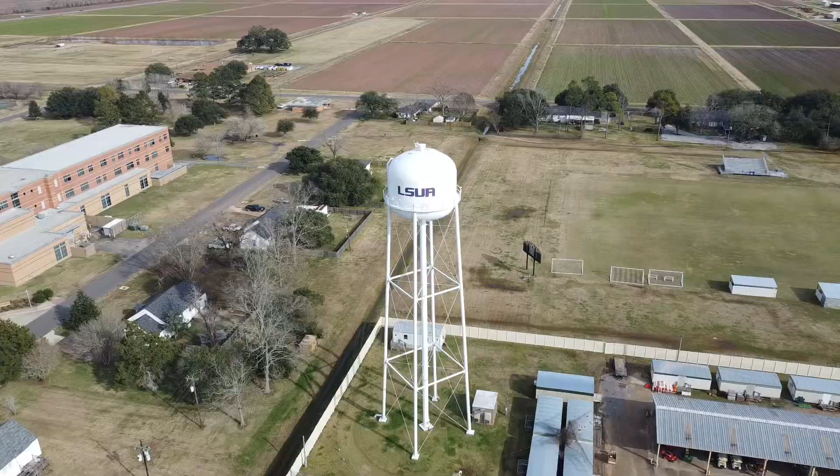Hey guys, today we will be talking about the law of conservation of mass and energy, and continuity, as these things relate to irrigation systems.

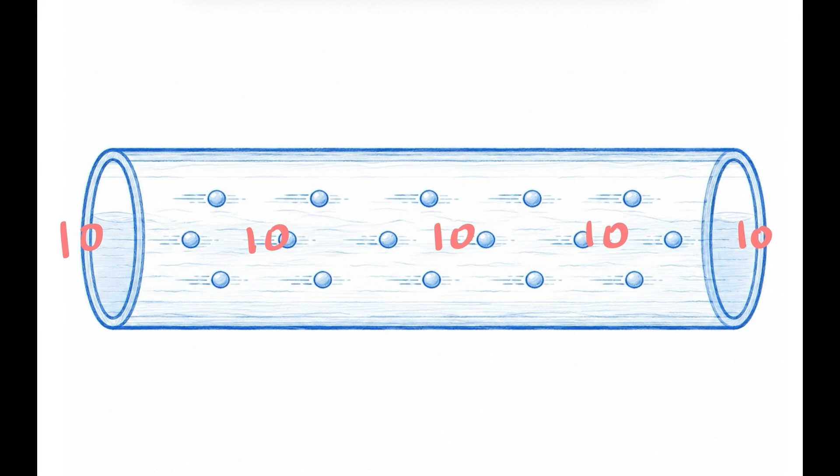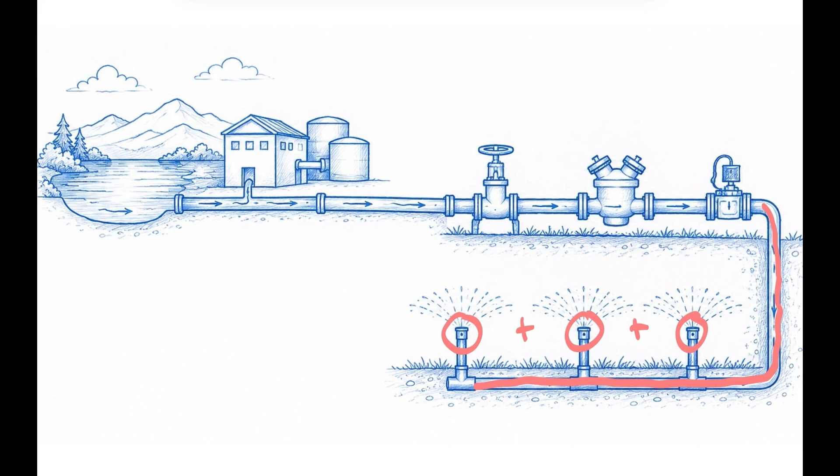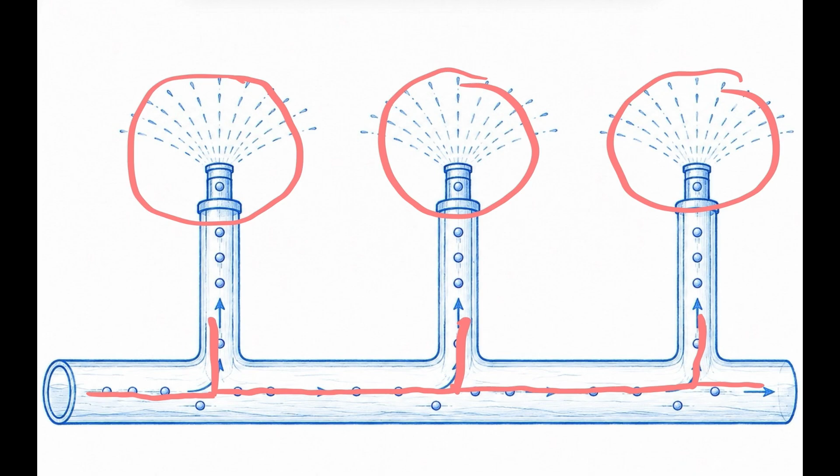The law of conservation of mass is this concept in physics that means that as water moves through a pipe, the amount of water doesn't change. The same amount of water exiting the system through sprinkler heads and faucets first had to move through the pipes, valves, fittings, backflow, even further up to the water main, pump house, treatment plant, whatever. So when the pipe branches, the flow splits between different paths, but if you add all of those up back together, it's going to be the exact same as the total amount of water that entered the branch.

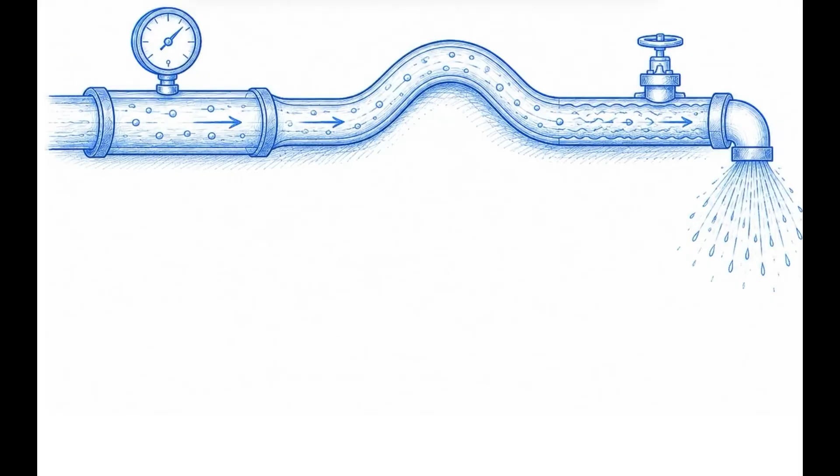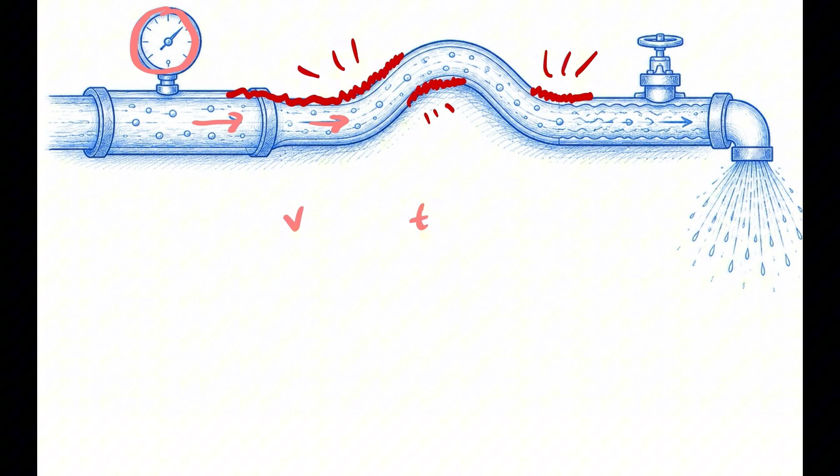The law of conservation of energy now is separate but similar. It's saying the same kind of thing about energy. Energy is not created or destroyed, it only changes forms. So in an irrigation system, pressure is an expression of energy, and that can turn into velocity. Velocity can turn into turbulence, and some of that mechanical energy becomes thermal energy through friction. Pressure can also become elevation.

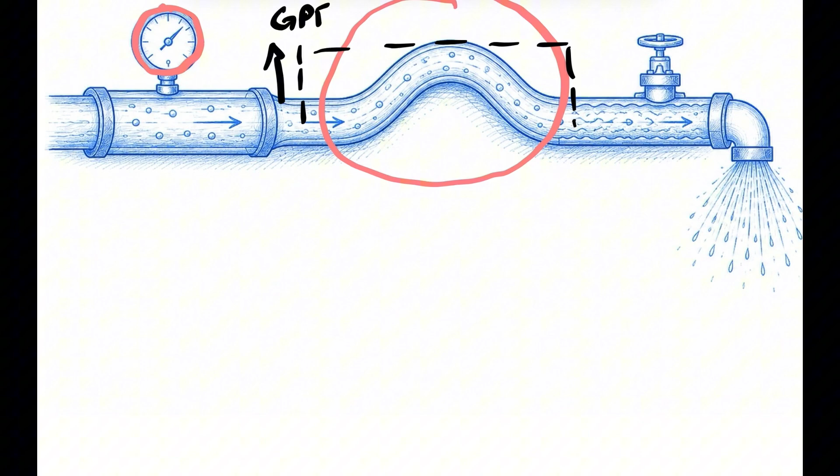It can be used to do work. So for example, as water flows uphill, some of that pressure is converted into gravitational potential energy. Then as the pipe comes back downhill, that energy is converted back into pressure.

Continuity is the final principle, and that just basically says that because water is essentially incompressible, it's not like air, you can't compress it, its density stays constant, and that goes into some equations that output this idea that flow rate is determined by two things.

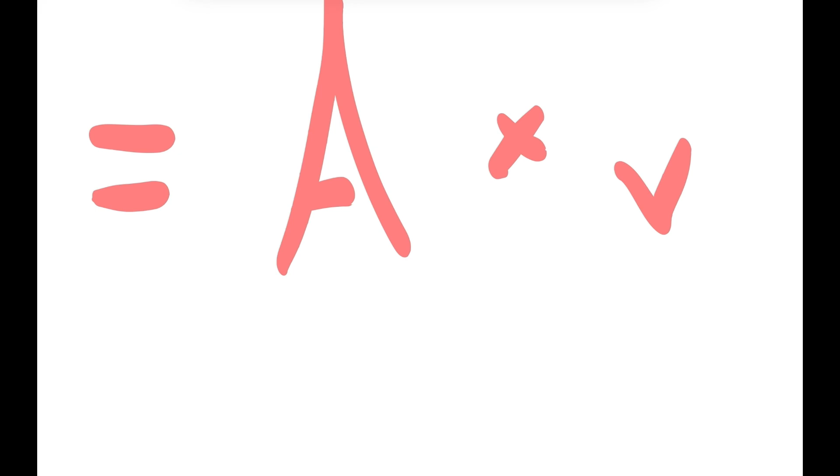So Q equals A times V. A is the cross-sectional area of the pipe, and then we multiply that by the velocity of the water moving through it, which is why we have gallons per minute. We're looking at the cross-sectional area, the amount of water in a certain amount of time traveling through that area.

That's also why sprinkler nozzles take pressure inside the pipe and convert it into a high-speed stream of water that travels across your lawn.

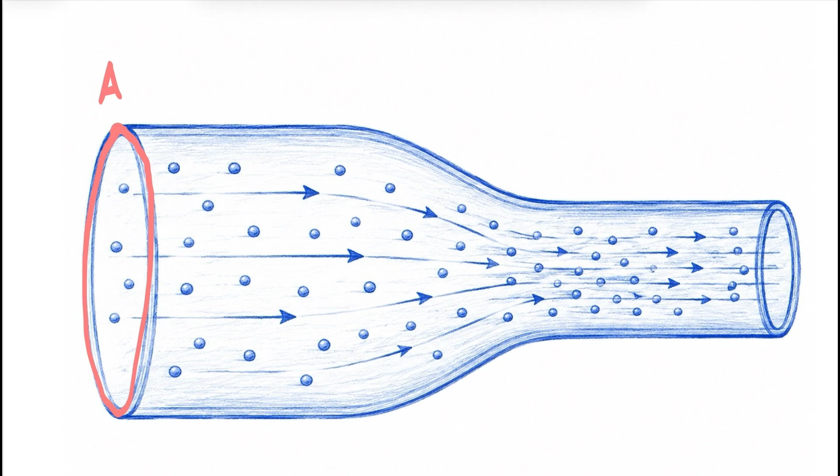Q is the flow rate, A is the cross-sectional area, and V is the velocity, which means if one of those changes, the other has to change as well. If A decreases, then V has to increase, which means when the area decreases, like in a sprinkler nozzle or when you have a restriction in your pipe, velocity is going to increase.

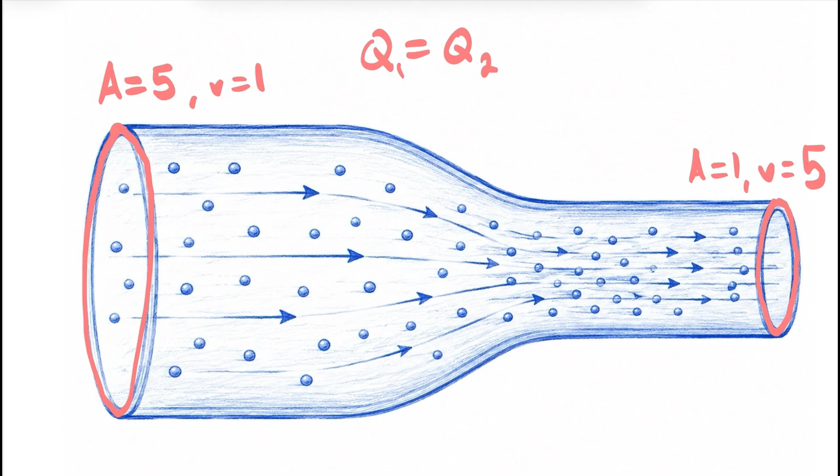That's why also putting your thumb on the end of a hose or putting a nozzle on a hose makes the water shoot further and faster.

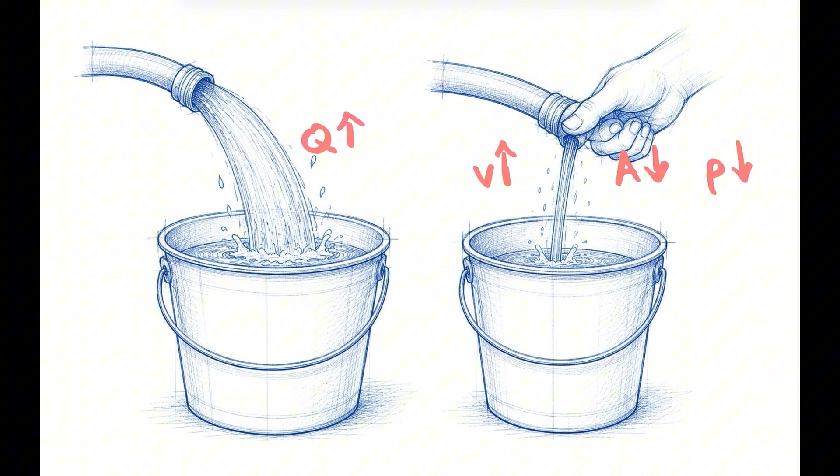But it also means the opposite is true. Putting your thumb over the hose or putting a nozzle on doesn't make more water come out. In fact, because you're creating a restriction to that flow, less water is going to come out. If you were filling a bucket, for example, it would fill slightly faster without your thumb over the hose, even though the water coming out with your thumb there is moving a lot faster.

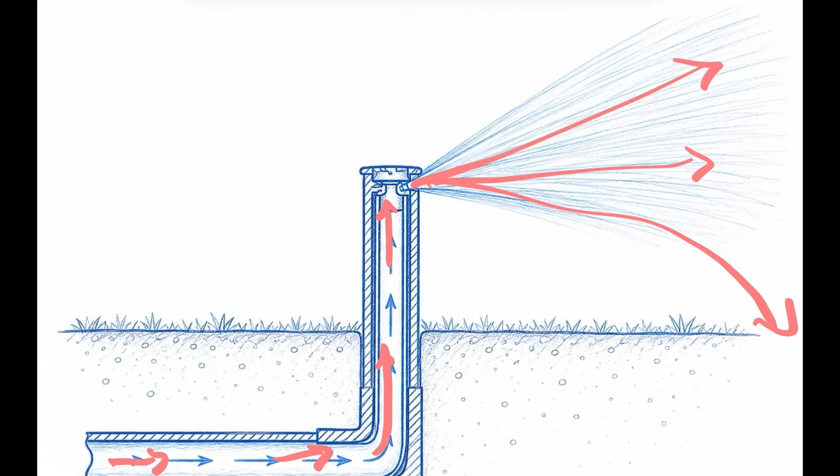Water naturally moves from areas of higher pressure inside the pipe towards lower pressure areas outside of the sprinkler head. Once it leaves the nozzle, its momentum carries it through the air, and gravity then eventually decides where it lands on the grass. The same kind of thing happens inside a pipe when there's an obstruction.

Let's look at that a little bit. Let's say a bad repair was done to an irrigation line leak, and they got some rocks into the pipe. Those rocks move downstream until they reach a T or an elbow, where their shape causes them to get stuck. Now, instead of water flowing through the full diameter of that 1-inch pipe, maybe it's only able to squeeze through a few tiny cracks between the rocks.

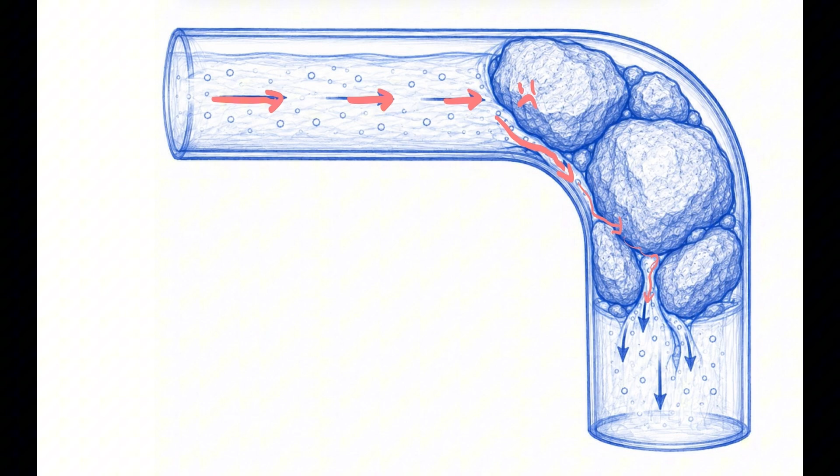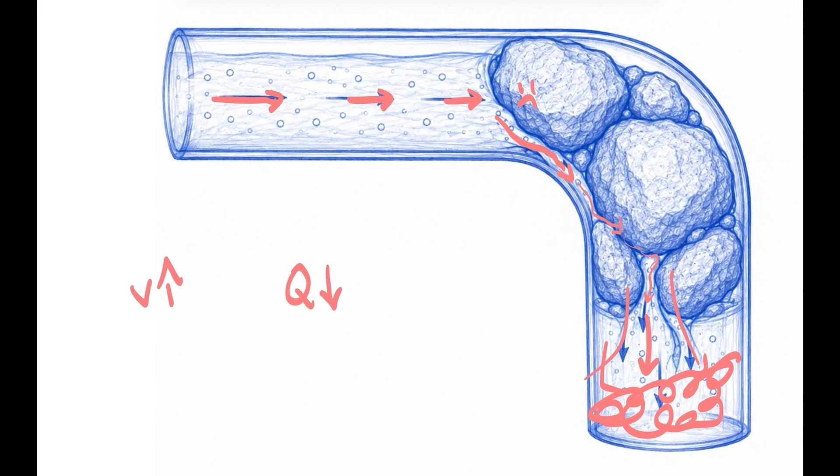That's going to speed up the velocity, but it's going to lower the flow a lot because it's creating that restriction. It's basically like putting a little nozzle inside of the pipe. The water now has to move extremely fast through those small openings, but pressure builds up upstream of the blockage. But turbulence, friction, and restriction prevent adequate flow, and they prevent the pressure from reaching everything downstream.

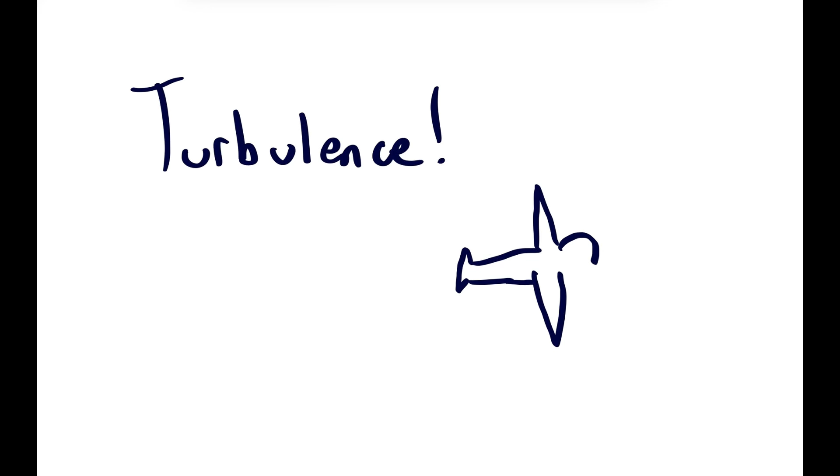Turbulence is a term used to describe water moving in chaotic little swirls instead of flowing smoothly in one direction like we want it to. That swirling motion causes the water molecules to collide with each other and the pipe walls a bunch more, and that wastes the energy as heat, that friction that we talked about.

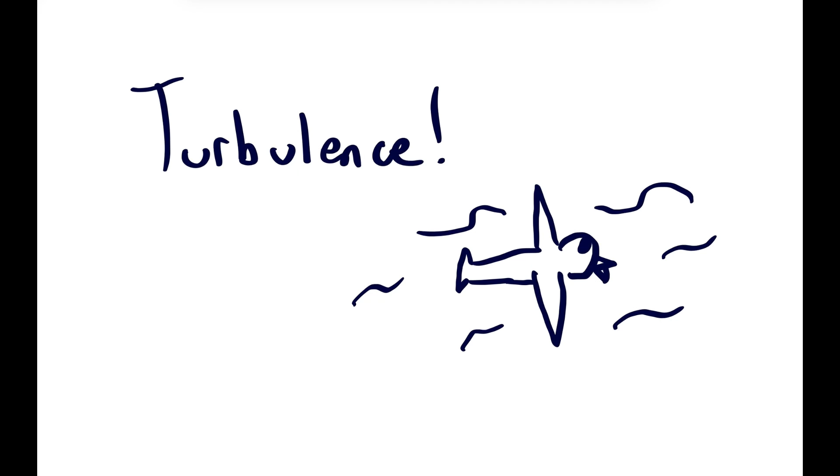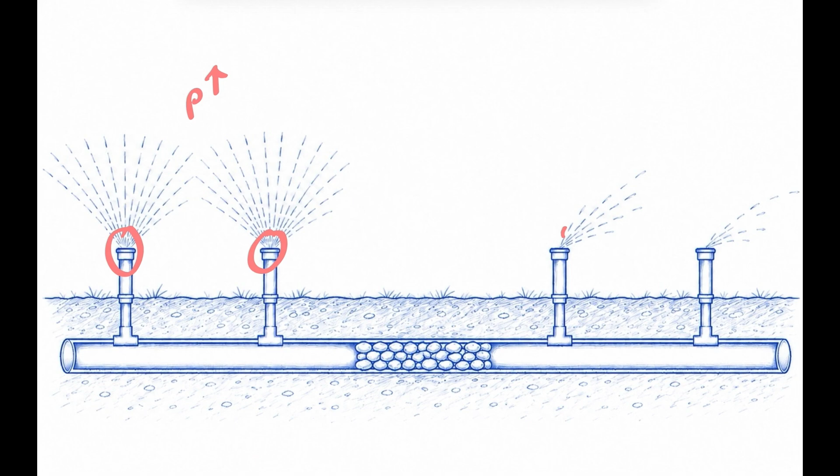On the surface, that usually means sprinkler heads before the obstruction have higher pressure than heads after the blockage occurred, which is why sometimes you'll see one sprinkler head or a few sprinkler heads towards the end of a line that have really bad pressure, and then some earlier in the line that have great pressure.

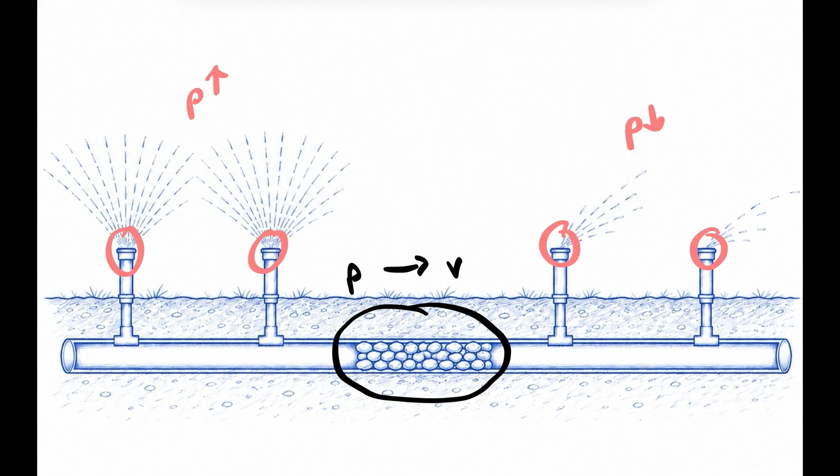What's happening is that pressure energy is being converted into velocity and turbulence inside the obstruction before the water ever reaches the sprinkler heads. That creates an irreversible loss of mechanical energy, turning it all into thermal energy, so we can't use it anymore to move the water.

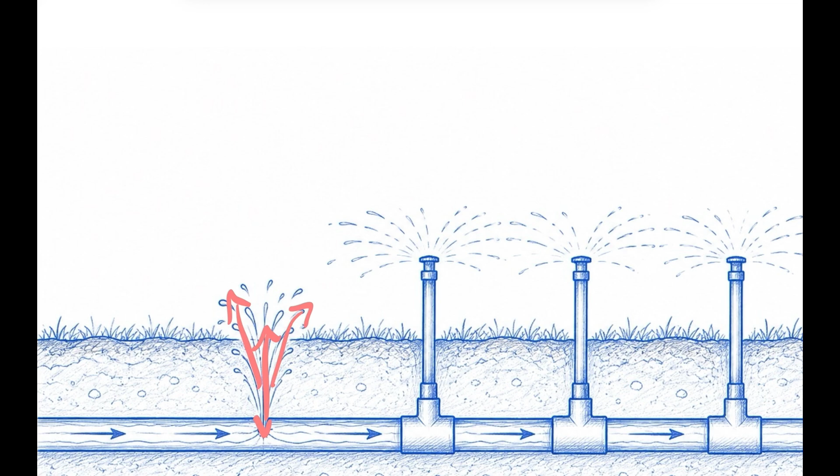Now, let's compare that to the opposite situation, a leak. Let's say somebody was installing a fence and drove an auger straight through a pipe in a sprinkler lateral line. Now, that's another place for water to leave the system.

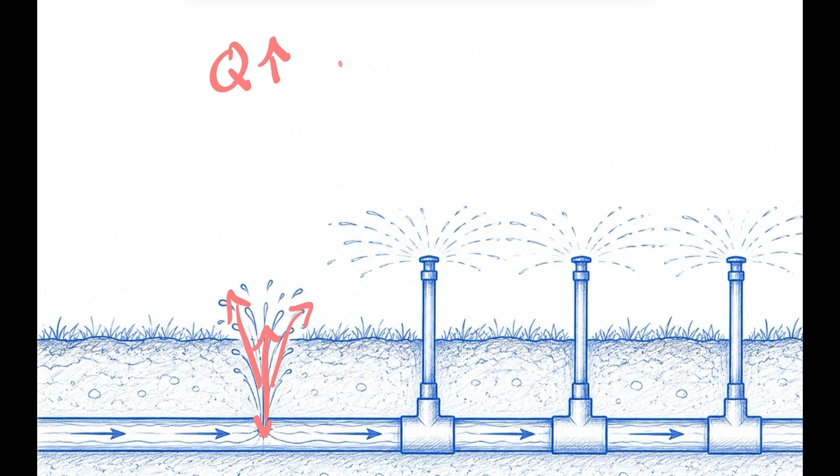This is going to behave differently than an obstruction, and in fact, it's going to be the opposite. Instead of restricting the flow, you've increased the amount of flow that the system's trying to supply. It's basically like adding another sprinkler head or a big sprinkler head where the leak is, with the nozzle about the size of whatever hole they created.

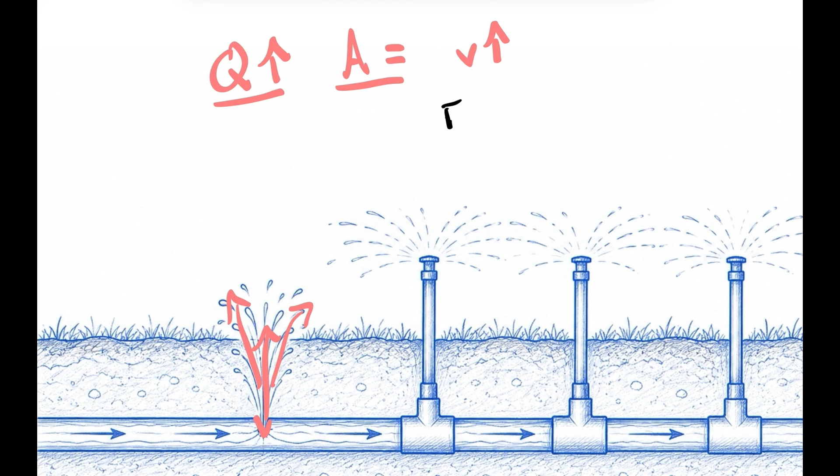Now, more water has to move through the shared upstream piping. That creates friction loss through the entire system, and it moves your water source further down its pressure versus flow curve, which we can talk about in another video, meaning less pressure is going to be available.

More of the available pressure energy is going to be used up before the water ever reaches the sprinkler heads. The result then is that pressure is going to drop throughout the whole zone, although some heads might be affected more than others depending on where the leak is located.

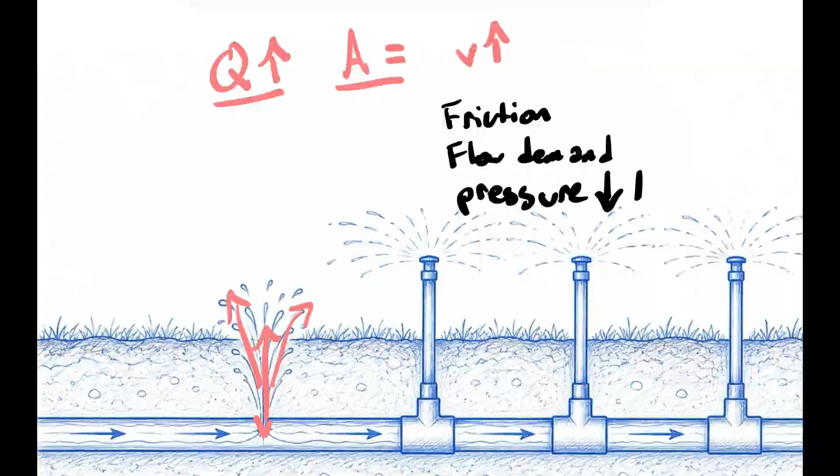The laws of conservation of mass and energy, along with continuity, explain a huge amount of what happens inside irrigation systems. Conservation of mass tells us that water isn't disappearing. Conservation of energy tells us where the energy is going. And continuity tells us how flow, pipe size, and velocity are all connected.

Once you understand those three ideas, everything in sprinkler hydraulics, from nozzles to leaks, obstructions, friction loss, and just general design, starts to make a lot more sense.